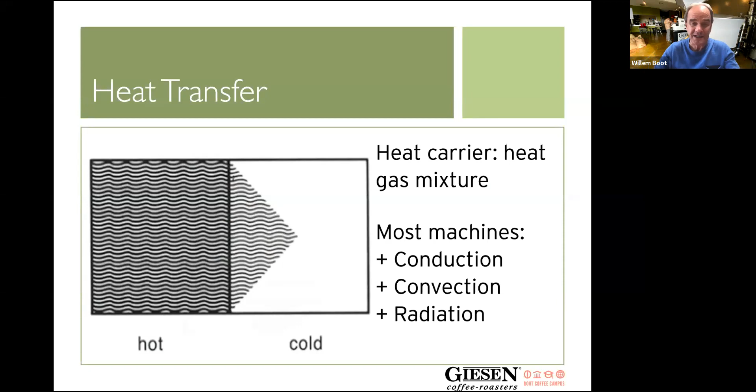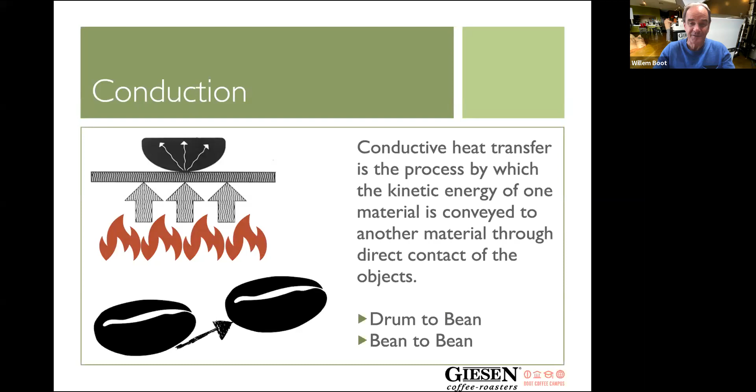Conductive heat is basically heat transfer through contact, from the drum to the bean or from the beans to the beans. Convection heat is heat transfer by preheated air using that medium. And Giesen machines are equipped with very powerful burners and very powerful control on the airflow, which allows the operator to use convection heat at his or her discretion.

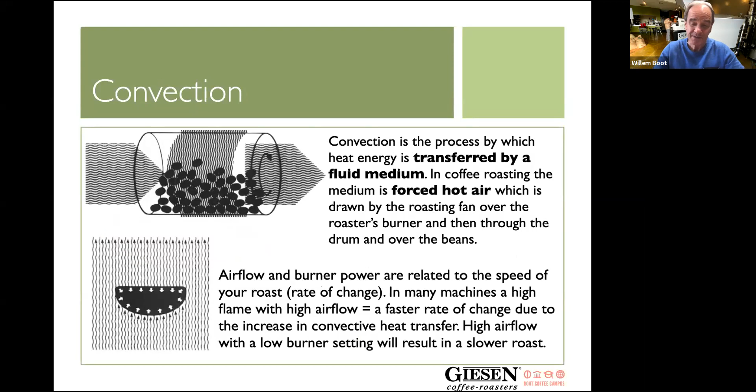And then besides conduction and convection heat, there's radiation heat, which is the heat transferred through the materials like the cast iron of the Giesen, which is a unique feature for the Giesen. And when it comes to the profiling options with Giesen roasters, there are basically 5 distinct parameters or 5 distinct instruments that are at our disposal to create profiles.

First and foremost, we have the ability to set the charge temperature at a specific level, and the higher my charge temperature, the more rigorous the start of my roast will be, or the lower my charge temperature, the more gentle, the slower the profile will get its start.

Then secondly, as we covered also during the last webinar, I can use my set point setting. That's the temperature set point. As you can see here on this picture of the panel screen, the set point on this specific picture is at 415 degrees. So I can use that set point by lowering it or increasing it, allowing the roast to evolve. A lot of roasters, however, prefer to not use that parameter, not use set roasting. So they will push it out of the way by increasing it so that it becomes more like a safety cutoff point.

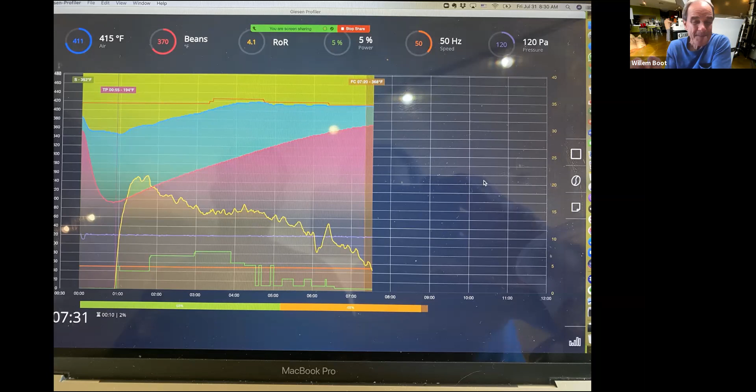But you can see here in this specific photo, around 6 minutes and 30 seconds almost, a little peak. I need to ask Marcus what could have caused that. Sometimes this is simply caused by the fact that he might have been taking a sample at the 6 minute mark. You can see it comes down. He puts the sample trier back, and then for a brief moment, the thermocouple picks up heat in a different way. That can be a factor. These temperature sensors are very sensitive.

And then under that yellow line, you can see the green line. That is basically heat supply, different levels of heat supply. And that's what I really like about this profiling software. It gives you a good reference.

We get a lot of questions about whether or not it's possible to incorporate this new software into older Giesen machines. With some of the machines, it is possible. With other machines, it's a little bit more tricky. So unfortunately, I don't have a standard answer on that at this moment. But I recommend that you connect with David Satvin if you're here in the US, or with the Giesen technical help desk to go over that. For that purpose, we would need your model number and the serial number of your machine to make that determination.

So for today's roasting trial, we did some work before this webinar, and I think the plan is to do a live roast. Marcus is going to be roasting. Marcus, are we pretty well set to do some roasting today? He's in another room, so I cannot hear him, and it's always very tricky when you're in the same space with the interference of the different computers. But he'll be doing a roast with us with this amazing WPG1, which is the sample roaster of Giesen, the gas-fired sample roaster.

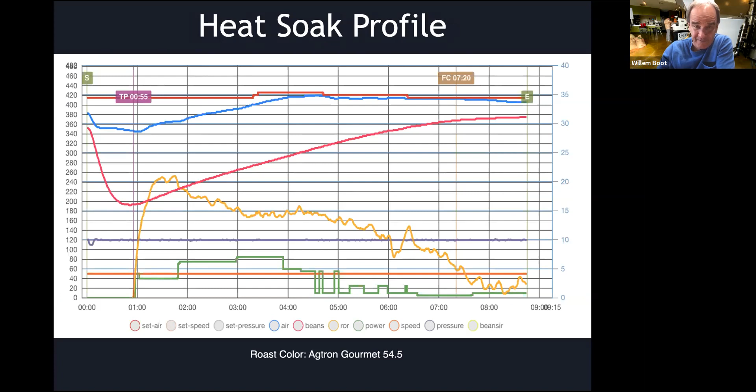If we use 60% heat supply, we typically with this profile are able to complete a roast in about 9 to 10 minutes. But you can see the impact is displayed very much through the rate of rise. And this is where the rate of rise is such a wonderful tool to analyze. I'm just going back in this presentation. Look at the rate of rise that we have here. You can see at the peak of the rate of rise, we were at a little bit over 20. And here we are close to 25.

So that means when the rate of rise is at 25, that means it's 25 degrees per 30 seconds. That means 50 degrees per minute, right? That's a lot. And you have to be very careful to stay at that high point. In this case of this specific roast, we see from the 1.5 minute mark down to 8 minutes that the rate of rise tapered down rapidly.

Also, in this case, we see this little flick at the 6.5 minute mark, most likely again because that's when Marcus took a sample with the sample trier, which created this dip. And then when he put the sample trier back, it allowed the rate of rise to go up.

And while we're talking, I'm actually tasting from our La Mula. I'm tasting the heat soak versus the heat shock. Very nice. So the difference between the two profiles that we did is higher charge temperature with heat shock. And upon charging with the heat shock, we immediately started to supply heat to the coffee.

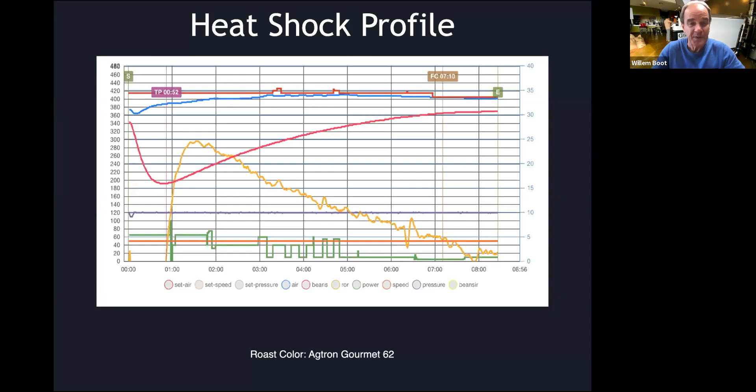And as I already mentioned, here we can see the development phase in this heat shock approach was 15%. In the previous one, it was 14%. And the drying phase and the Maillard phase outcomes were fairly similar. So that's the cool part, here we have a really good comparison between two profiles to the same endpoint, but using two different approaches.

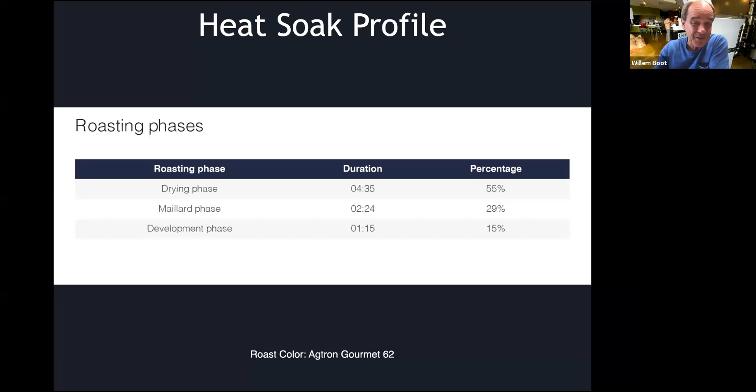And I'm going to explain what I'm tasting so that you can also put this to the test yourself and see if you can come to those same results. Now, as we already mentioned, all profiles always incorporate also the type of bean. For this specific approach, we used Finca La Mula washed, which is a geisha farm I started more than 10 years ago in Panama.

It's set up high up on a volcano in a secluded section of the Boquete Valley of Panama. Beautiful place. The moisture was 10.2%. The density was 72 kilograms per hectoliter. And we followed a heat shock as well as a heat soak.

I'm actually drinking now the heat shock, and it seems like the acidity of the coffee was very well exposed as a result of that approach. It created this pointed, snappy acidity, like you have in a Cabernet, like in a Sauvignon Blanc white wine, or like you have in apricots when they're not fully ripe, but slightly almost to that ripeness point. And that type of acidity has this snap, and it's also sweet.

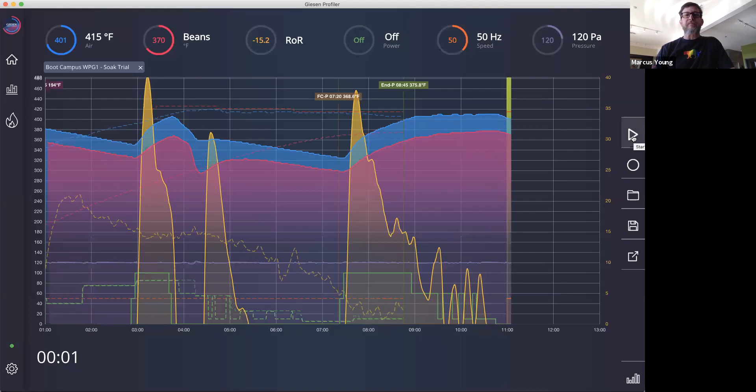Marcus, we can see you now. Is it possible for you to point your camera to the roaster? Sure. Let me move this table around. Okay. Yeah, so much higher charge temp. How's that on the roaster, everybody? Perfect.

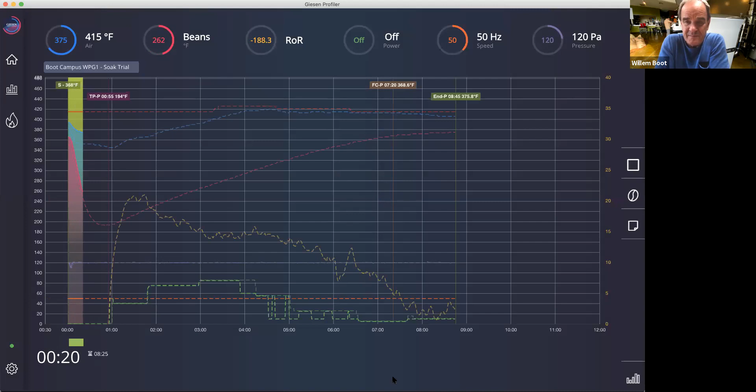And now I am playing this profile, so I'm going to have to come in and override it in a few areas. But I think the first thing that I'm going to do is I've already got this higher charge temp coming. You can see my air temperature is much hotter than the reference, and my bean temperature is also coming in hotter.

So I just turned on my burner about 15 seconds earlier than in the first profile. With the idea being, let's get this really high early rate of rise, but still try to draw out that middle phase, that Maillard phase, but we'll still have that relatively shorter drying time. And I'll go ahead and get my maximum gas up here now.

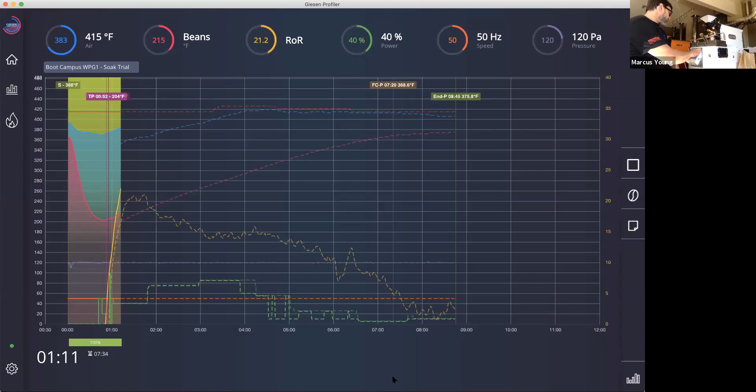And I am roasting using a combination of manual burner control, but also keeping a relatively low set point, you can see my set point here is at 415, so that I can still rely on the software to keep me from overheating and really make sure that I slow that roast as I approach and move through first crack to the end of my roast at a much higher rate of rise.

I'm going to take this back down to 60% just to leave it there, overriding the recorded profile that I have here. You know, a feature that you can also use with this is when you load up a profile and go to play it, you can actually tell the software to simply use that profile in the background as a visual reference, but give you full manual control.

So things are still moving very fast. So I'm going to just really start coming off my heat already. I have a lot of energy charged into these beans. As Willem said, they are quite dense, the 0.72 grams per milliliter. But these are also, this isn't this year's Fresh Award winning crop. This is some slightly older coffees. So I'm going to override that again. So being a little bit less aggressive might really benefit me.

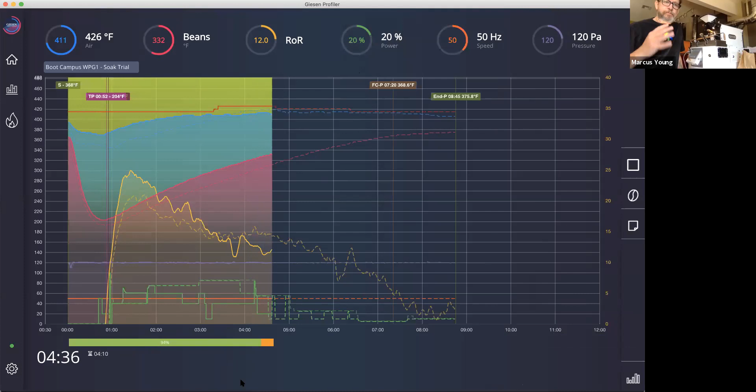On this again, you can also tell it at what temperature you want to record the end of the drying phase and start recording that midsection of your roast as far as percentage goes. And so here I have it at 163 Celsius, which is about 325 Fahrenheit. You can see it just automatically marked that.

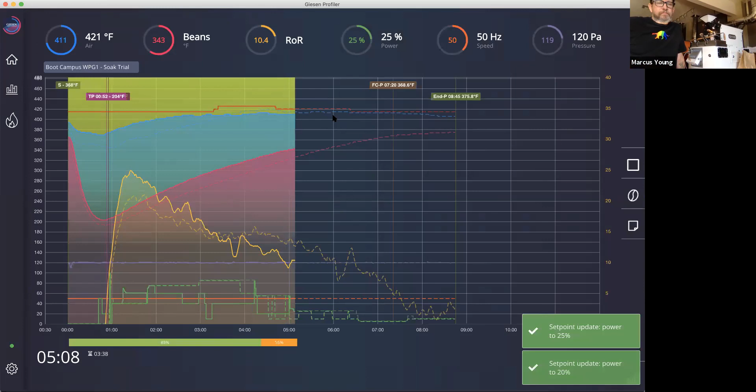So I think now the trick with this roast is going to be to slow it down enough that I don't just race into first crack, and at the same time to have enough energy in my coffee, which I think I will from that high rate of rise at the beginning, to actually drive those reactions, the evaporation of the moisture in the cells that drive first crack and drive some of those further sugar browning reactions.

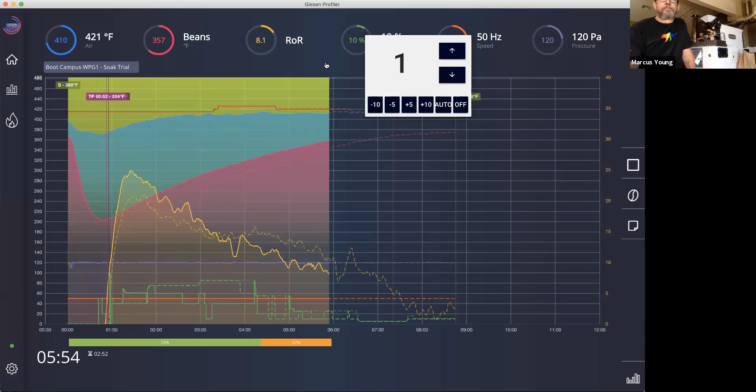I'm looking for first crack at around 365 to 370 Fahrenheit. I'm still quite a bit hotter. I'm really going to just come off this power and just let it coast at 1% now. But be prepared to come back if my rate of rise looks like it's in danger of stalling out.

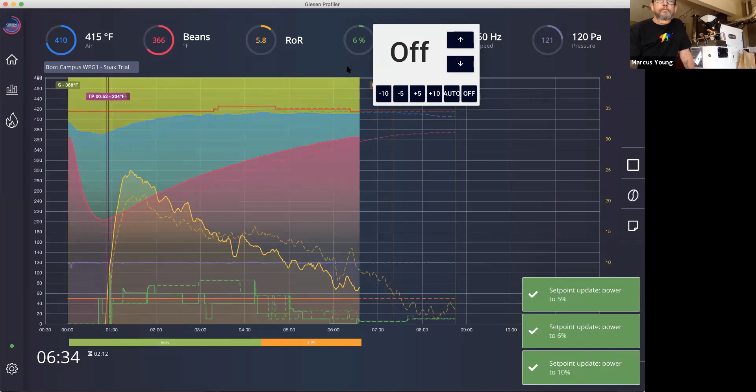And so this one went a little bit fast, got away from me a little bit. I'm just hearing first crack. I don't know if any of you can hear it, but I will say that this is by far the most dynamic first crack that I'm hearing of all of the trials of this coffee. So by really kind of packing it with energy, it seems to have become quite explosive at this point.

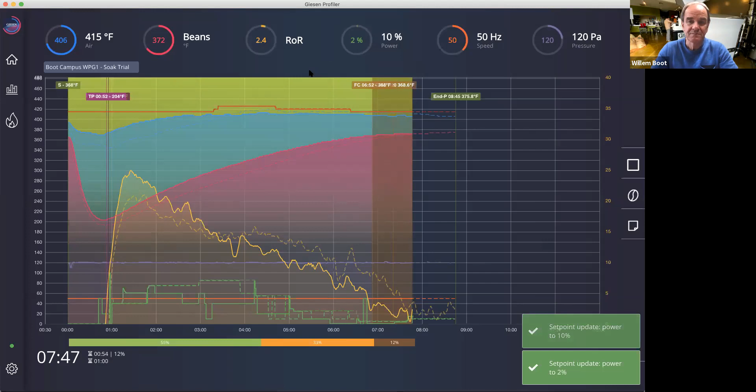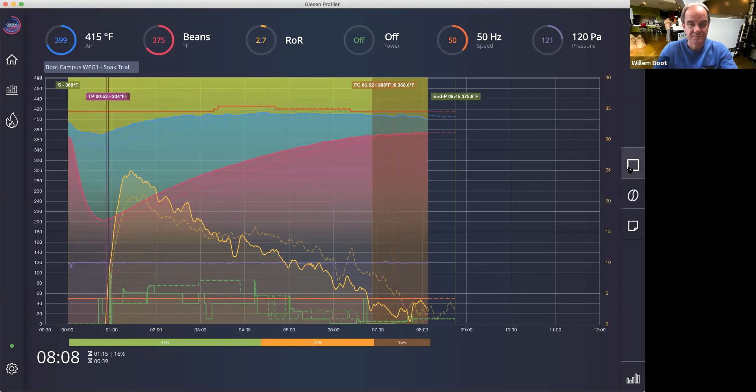And now I'm really watching this rate of rise. I see it dropping. I don't want it to go too low. So I'll give it a little more energy if I need to try to keep it moving forward till the end of my roast. I'm watching my development time and of course smelling my coffee. All right, and I'm going to get the coffee out of here.

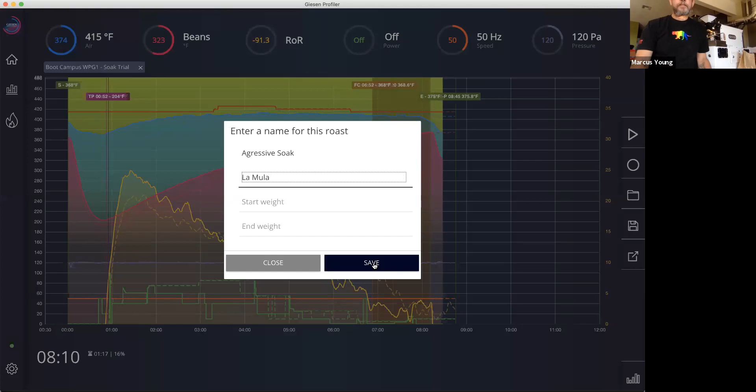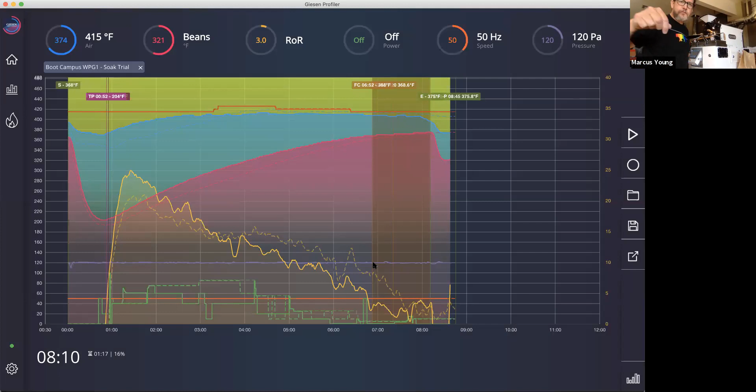That looks pretty good. I can save this, of course. Maybe I'll call this aggressive soak, so I can go back and reference that in the future. Yeah, the coffee looks pretty good. I think I was fairly close to my color target. Those other two trials were right at Agtron 69 for the soak, 70 for the more aggressive one. So they were very, very close.

I'll stop my share here. Great. That was cool. Very cool, Marcus. Let me see. I think there are a couple of more questions.

Here is a question. What do you suggest to hear the first crack? I use the Giesen W6, but usually cannot hear the first crack. This is, I would say, a challenge, not just for Giesen users, but for roasters in general. Roasting machines are often in busy places, either very busy retail places or warehouses where there's a lot of equipment going on. So what I suggest is that you take a reference point based on the bean temperature where you usually can expect the first crack to happen. And once you know where to expect it, it might be easier to hear.